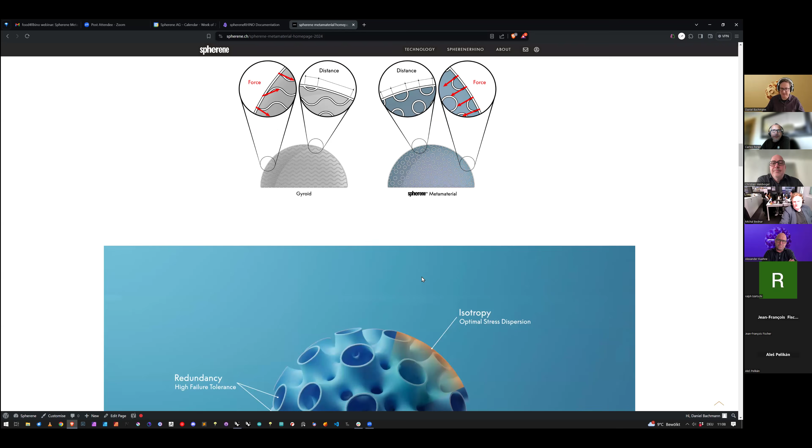So what Christian described before, I have some images here. We have this isotropy, meaning from all directions it behaves like force introducing, or it simplifies the introducing of force. We have this surface conformity - you see all these volcanoes following the surface. And if you would put this into a car bumper, for example, and crush it into a wall, all these little structures will still hold up most of the force that has been lost from the crushing of a little part of it.

Then we have fields where we can control density and thickness, and we do that in a very organic way. We do not distort any unit cells with a gyroid or TPMS structure in it. This always tries to be the inside or the outside of a sphere, and therefore we grow into your shape. So unlike other software where you first make a TPMS or gyroid and then cut away your shape, here you design your shape and design intent, and our structure grows inside.

We can combine any of our fields with any of our mesh modifiers. So here you see a cavity feature that is repulsing the minimal surface. Imagine you make a huge object for a movie prop where you want actors standing on it. You can make it hollow, so you do not print the inside, but on the outside we have a super strong thin shell with our Spherene structure that distributes the force all over. So it prints fast and it is very strong and lightweight.

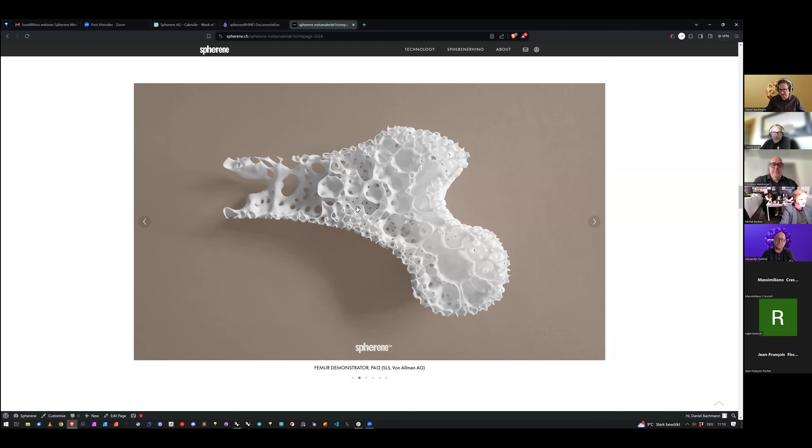Beautifully described here is the surface conformity, how it closes up to the surface. And also here, how fast we can make these transitions. They look really organic, like a coral or a real bone structure.

We can go really small with high performance materials. So this is an aluminium material, different kinds of resins.

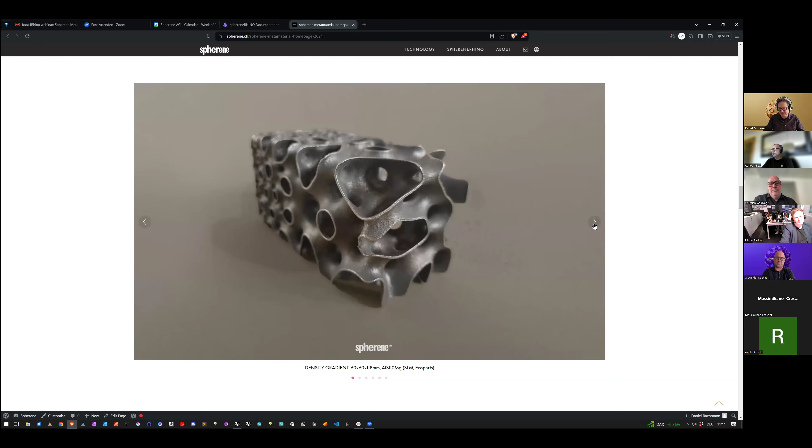Now, how does this look in Rhino? We worked really hard to make the best in class design tool. We provide you with an integration of Spherene, where in Rhino you work either with these points that you see here, representing our fields like density field, thickness field, cavity field, and so on. Then on the other hand, we work with mesh modifiers. So this sphere represents a so-called envelope, as we named it, and inside of this volume, this Spherene structure happens.

So on the left side, you see these black points with some values. These are radius values, imagine little spheres around each of these points. Then at the bottom here, we have this blue dot, representing a density point. So we need only one point and these few points here and this mesh to, by one button click, make this. You see this is a hollow sphere and it has kind of windows all around. This is a matter of two minutes of design work that I have to do.

You can import from any CAD software, just export your CAD part as a mesh, import it in Rhino, and work on your design. You will see how crazy fast and easy that is, so it's a huge time saver. So here you see the so-called envelope and a Spherene structure inside.

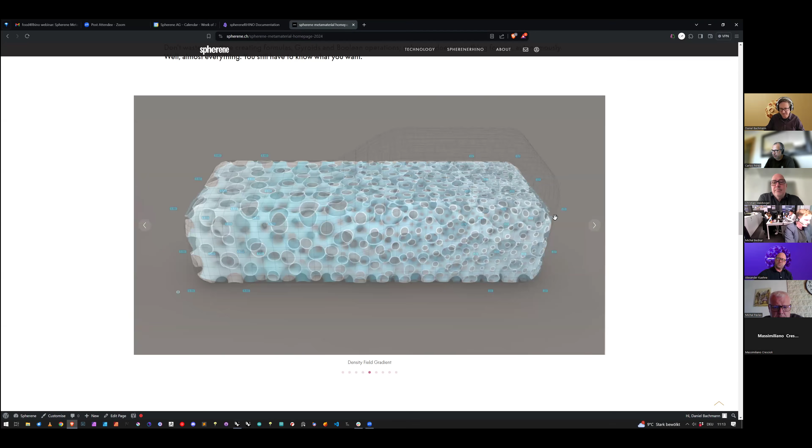Then you see a gradient of density. On the left side, we have these few numbers on points in position in space. On the right side also, and in between, we change from this 5.6 volume fraction to a 22% volume fraction in an organic way. The same is possible with wall thickness. These magenta dots represent wall thickness, going from 0.4 millimeters to 3 millimeters here.

Then we have a surface bias. We can also take the minimal surface that is really strong in its ideal position, and we can move it outside to the left or right and weaken it up. The effect that you see is small holes with long necks or big holes with short necks.

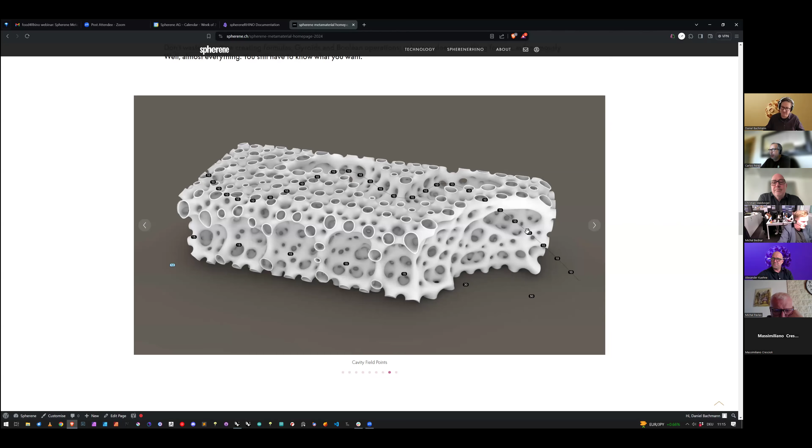And everything again in an organic fashion. Here you see some use of these cavity points. You can imagine an array on a line, on a curve, to make a cable channel so that the cable through this smooth surface will not be damaged, without modeling that in CAD. So you could do that, but this is another way how to creatively use our tools.

Then we have boundary meshes. So those are simple meshes that can be volumes or just sheets, dimensionless sheets without thickness. And we can tell them to thicken up or separate our volumes. So I will now show you what our release candidate 1 looks like. We have had alpha and beta versions for over a year now. And very, very soon, as Christian will tell you later, we will release this version.

So what is new? We have a toolbar with some really nice icons. So if you do not speak English, you can access these icons by image. So that's the main place where our Spherene stuff happens. The other space is in the layer system, and the next space you will see in the demo. So I told you we need a mesh. I create a sphere, a mesh sphere with a diameter of 60 millimeters. Now I create a new project. I click this button here, call it sphere.

Now watch this space here of the layer structure. I will be asked to select an envelope mesh, so I select this one. What happened is Spherene already populated our project name containing a meshes layer and a fields layer. In the mesh layer, we have an envelope, that is this mesh here, and the field layer is populated with the density fields with this point here. There is a number inside, 5.6.

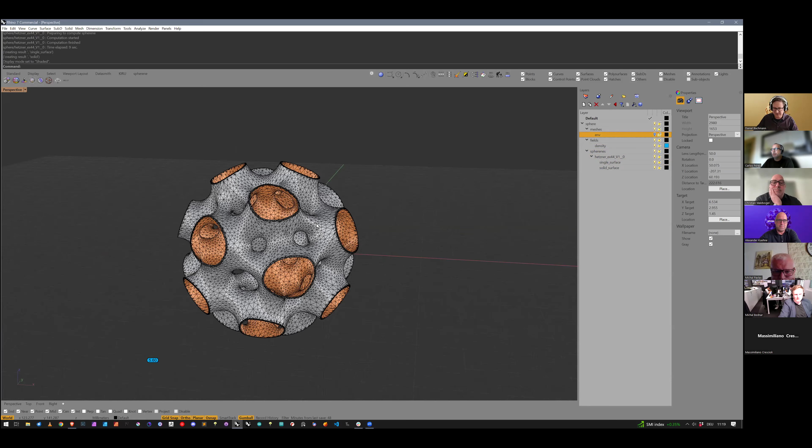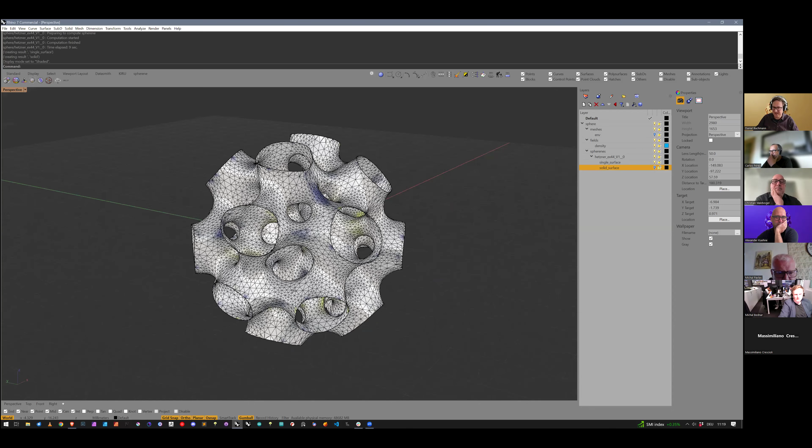Let's hide the original envelope and inspect what we have. The single surface looks like this. It has no wall thickness. It has some coloring here, and this coloring represents the quality of the surface. I told you before that we have the insides and outsides of spheres that we interconnect. At each of these interconnections, we have to grow the connection, so it will always be the best possible that is algorithmically feasible. So it's almost perfect, and this is what these colors represent here. So you can check the quality of your surface.

Then on the other hand, we have the solid surface that has thickened up to 0.4 millimeters. The interesting thing with this color scheme is you see the two volumes. Imagine this now to be an engineering part, a heat exchanger. In the orange part, you can have water flowing. In the gray part, you can have air flowing. And all in all, it is a structural part that is very rigid. So you can imagine your heat exchanger not being only a cylinder, it can also be like in a frame of an airplane, for example, and has real functionality inside.

The computation button, every time I click it, will generate an output here. So I can work on my design while it is calculating. So what I do now, I make a gradient. I just copy this point here and make a gradient from 5 to 16 volume percentage. I place this in the middle. The more points you use here, the denser your so-called force field will be. Let's shade this so that you see better what I do.

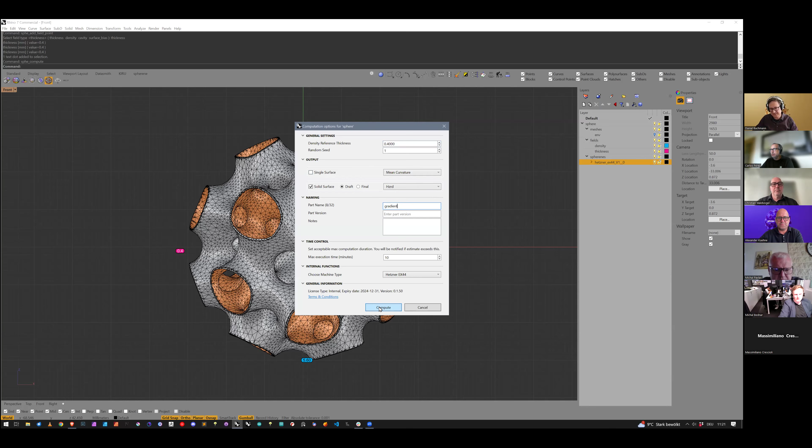Now I introduced the density gradient, and on the other axis, I want to introduce a thickness gradient. So here I can add field points. I have a selection of different field points. I select thickness, place 1 point here, 1 point here, double click the right one. And what this means: please do a 0.4 millimeter to 2 millimeter wall thickness change in this axis, do a density change in the other axis. Now let's calculate that and name this gradient, compute only the solid surface.

So now this is all cool. We have this open structure. Let's hide these fields. So we have the density and thickness field, and I will show you now what happens with the mesh modifiers that we have. So this is our envelope. I will use the same envelope and add a boundary now. Click the boundary button, click this object here. What this did, it made a copy of my envelope and changed the color and made this layer here.

If I would give this object here now a wall thickness, it will be an infill. But this is boring. We do something more complicated. So let's use some Rhino tools and cut this apart. So in CAD, you can prepare all these design intentions that you have. And as you see, I do not even think about the structure itself that it's generating. I always think about my design intent. I used mesh split now and split this mesh with these curves. So let's delete these guys and let's see. So we have now separated objects, all right?

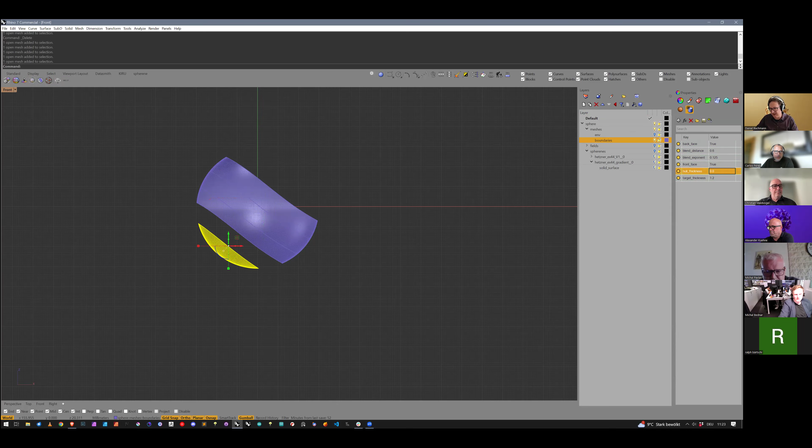Now I told you we have the toolbar as Spherene tool, we have the layer, and now I introduce this attribute user text, because here we have some functionality where we can tell an object to have a hull thickness, for example, of 1 millimeter. We can tell this one also to have a hull of 1 millimeter, but I change a flag here to false. And I will not explain it now because you will see what it does in the result. So I have the back face and front face changed for these two objects. So one is false true and one is true false.

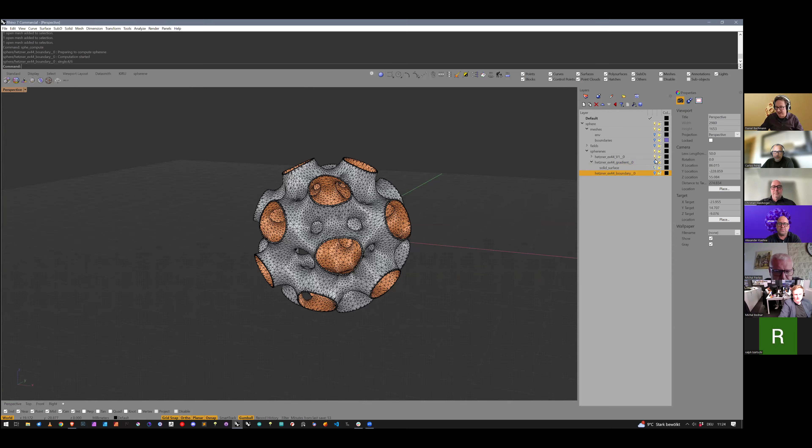And on this one, I leave the hull thickness to 0 and tell the structure to thicken up to that surface with a specific thickness. Let's calculate that. Let's call this boundary. And let's examine our previous results. So this was the first one that we created. And now let's check out the one with the gradient.

We have a density gradient that has lower density on the bottom and higher on the top. On the left side, you see a wall thickness of 0.4. On the right side, a wall thickness of 2 millimeters. And if I shade this, you can see how this looks. And while it is computing the result, I introduce a cavity field on the bottom here. I have to activate this one to see. And this is behaving like a sphere. So I tell this to have 60 millimeters diameter and I compute that.

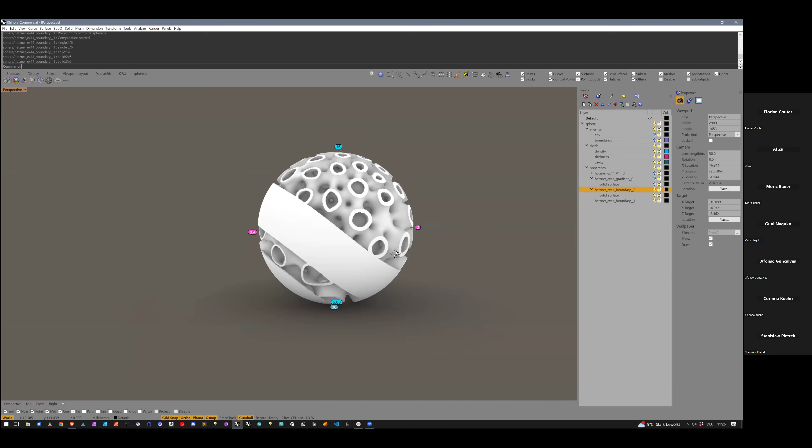So let's examine the output of the boundaries. So it didn't do what I wanted. This morning we encountered a bug. I hoped it worked. So the true false flags ignored what I said. This will be fixed on Monday. But see that we have closed the wall with 1 millimeter wall thickness using a simple mesh. So I made now something really complicated in about 10 minutes or so, without even having to deal with any formulas or anything.

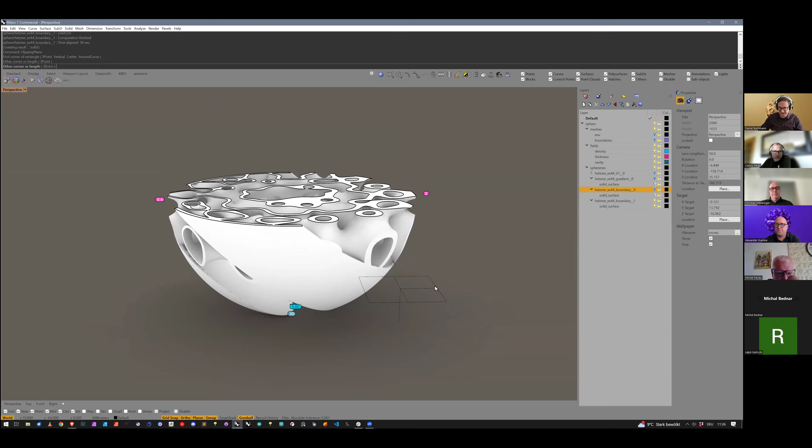Let's see this one with the cavity. Cool thing now is this is one object that is ready to print. You do not have to Boolean anything. It comes out nicely right out of the box. And now I want to give it over to Christian. And he shows you now what this means. I showed you now a little sphere, but what amazing things can you do with it? Christian explains that.

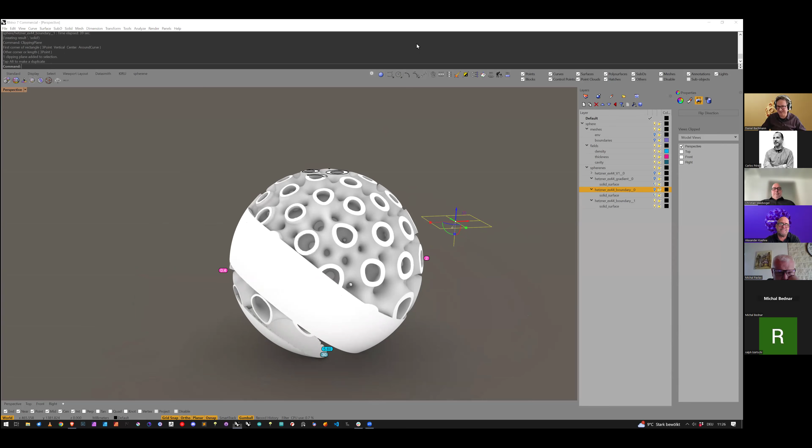Thank you, Daniel. Let me just switch over. Can you see this?

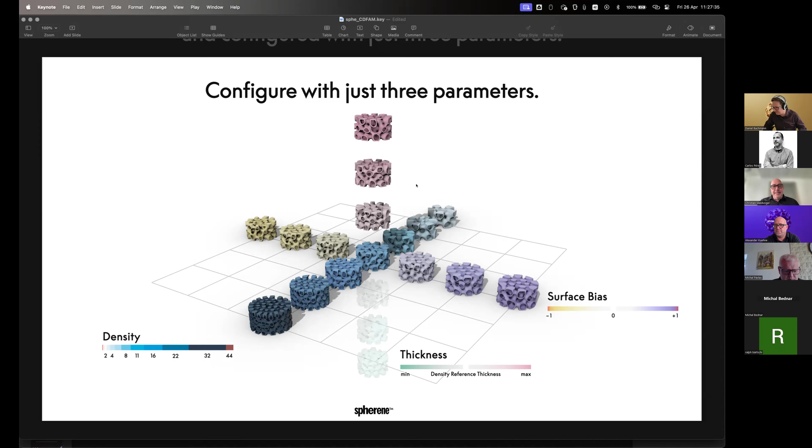Now, here we go. We tested these samples, and we see here that this all behaves extremely regularly and always follows the same pattern, for which I hope, in not too much time, we'll be able to provide a formula that predicts the stress and strain behavior of a surface.

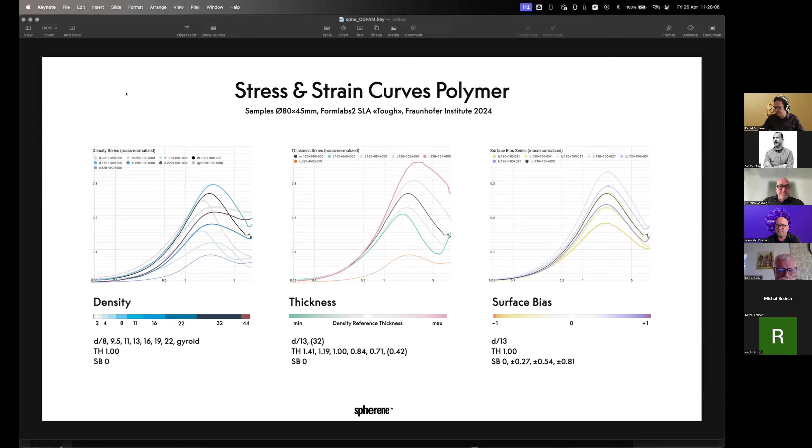One thing that's interesting to note is that the whole thing, because it is so regular, behaves with a density series that is the same as the numbers you might know from the old days when the aperture on a photo camera was still adjusted manually, right? So to make a meaningful gradient in density, you can use those numbers. So to go from 2 to 2.8 to 4 to 5.6, etc., will give meaningful differences.

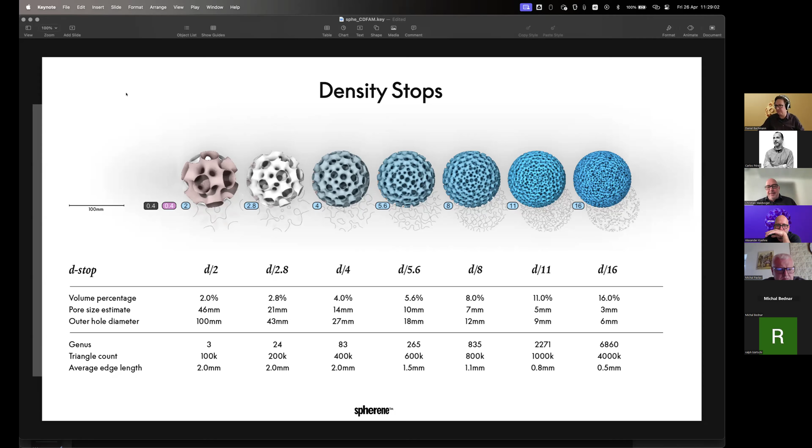Obviously, you can choose densities at any value. You can do 8 and 7.9, but you won't see that much of a difference. So this square root of 2 series kind of helps you when you want to go a bit thicker or a bit less thick.

Now, I want to show you a little project that one could do. We're going to do a small fixture. So we have a design space here, some forces that need to be countered by the part, and some interfaces where screws are going to be entered.

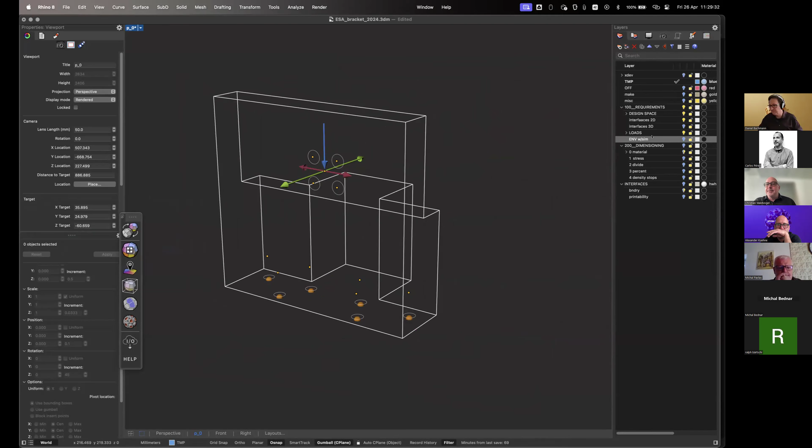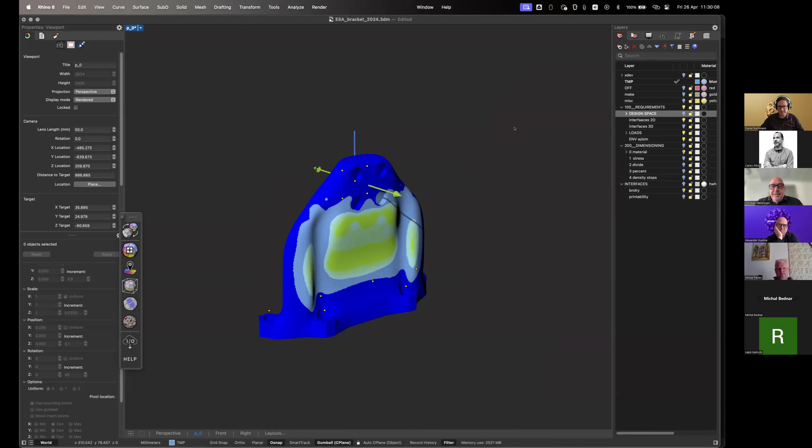We designed an envelope using, you could say, a combination of design, optical design, design intent, some engineering knowledge. But you could also use a simplified version of topology optimization, obviously, right? So we came up with this shape, and we designed some interfaces as solid bodies. I did all that CAD work beforehand, so we don't have to deal with that during the presentation.

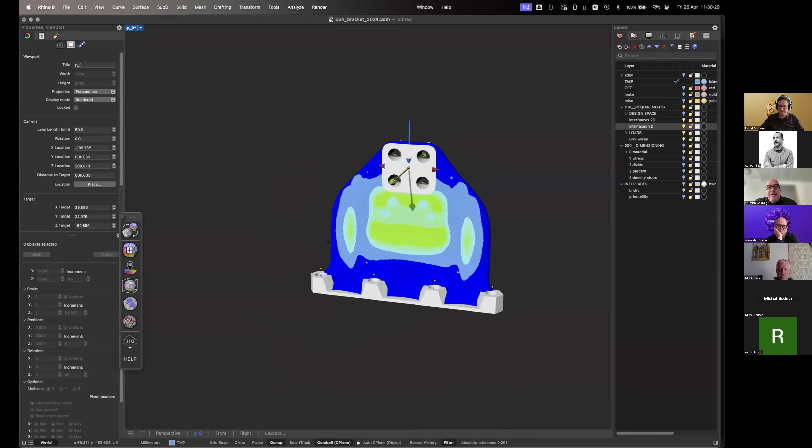Now, we simulated the loads that we're going to get on this envelope, as if the envelope was a piece of solid material. And because it's so thin, and because it's a demo, we just use a single simulation, so front and back are the same. That wouldn't be the case, obviously.

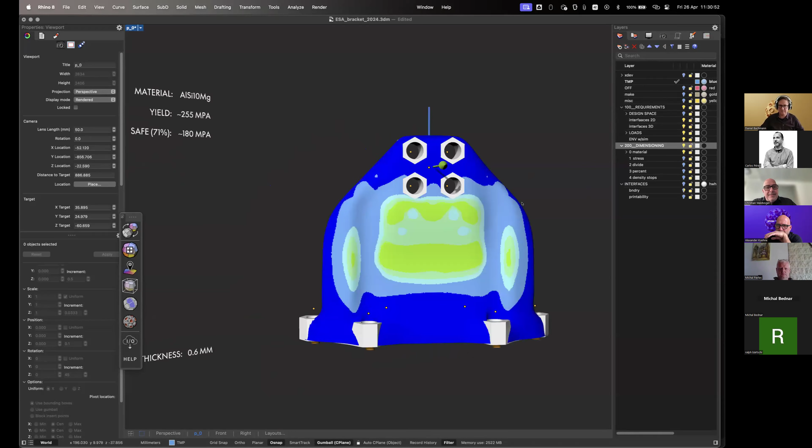We do have some material that is given, aluminum in this case, which has a yield strength of 255. And when we take into account the safety factor of 1.4, square root of 2, obviously, we see that we have a maximum stress that we can allow of 180 MPa. And we need to print at 0.6 millimeter thickness.

So if we look at the actual stresses that we see, this is obviously all ballpark. We're doing this off the cuff, right? So we see we have around 30 MPa in the light green areas, going down to 6 MPa in the dark blue. I just see that the image shifted here. I'm so sorry. I should move this over a little bit. Okay, now it's correct again.

Now we know we have 30 MPa. We cannot go above 180, right? So we do a simple computation. We calculate 180 divided by 30, which gives us 6. That means that 100% density, full material bulk, divided by 6 is 16%. That leads us to the knowledge that we can go for a density of 16 at the most intense places.

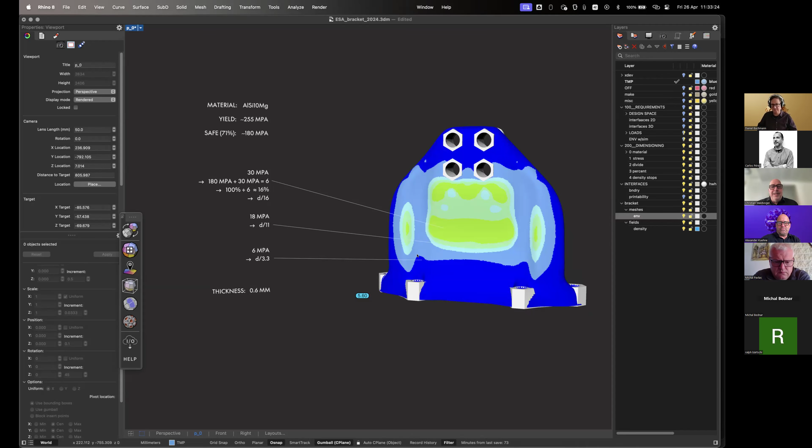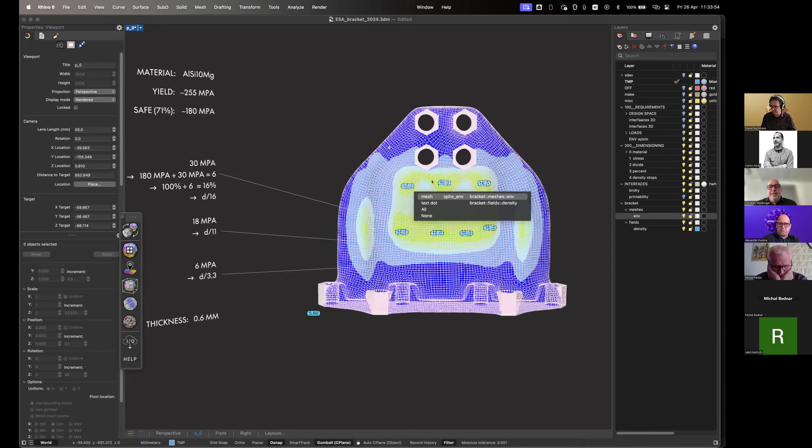Now we have to go and do the densities. So we know that the green here needs to be 16. So I'll press on this button here, say I want to do a new density point, I enter 16 and populate this here with a few such points. Doesn't need to be too many. And for the sake of simplicity, I'm going to group them real quick.

Then, from the cheat sheet we saw before, where I showed the densities, we know what the feature size is going to be. And we know that at 3.3, there's almost no material going to be left. So we know that 11 is kind of good for the actual size of this bracket. So we're going to do the rest at density 11.

So that means from here on, we're going to have 11, right? And out here as well. And I was a bit oblivious that we need 16 here as well. So that's our density field. We see that we have a new layer here, density, right? So I'm just going to quickly select all those and group them together. We don't need that. Sorry, wrong. Don't need that one here.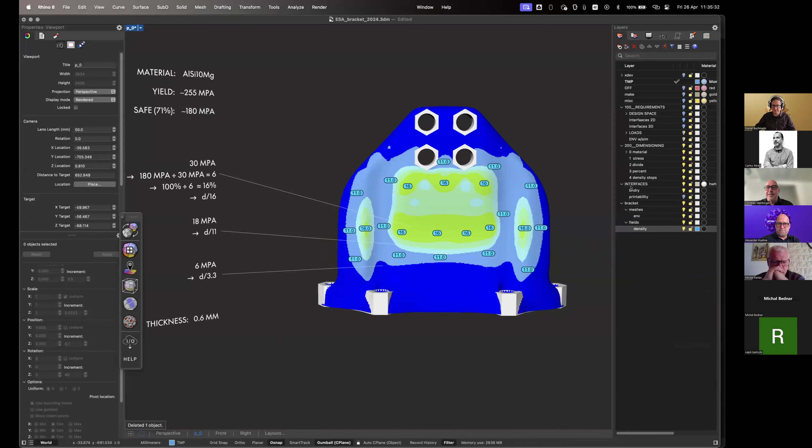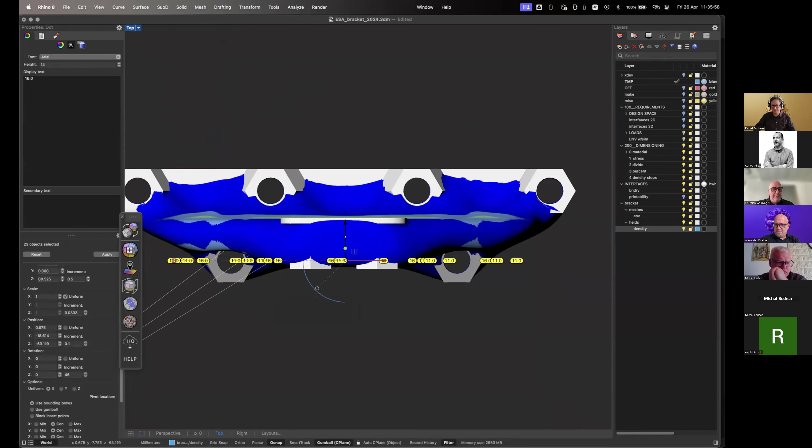So if we look at it from the top, we see that these densities are obviously now on the surface and just on one side. And because we're doing it the simple way now, we're just going to repeat them across the whole depth of the part so that we get an even density distribution again.

As we heard before, we are ready to go. So we're computing. Now, take note here in the density reference thickness, I entered 0.6 because we have to think of the densities being calculated for a thickness of 0.6. That's why I put it up here.

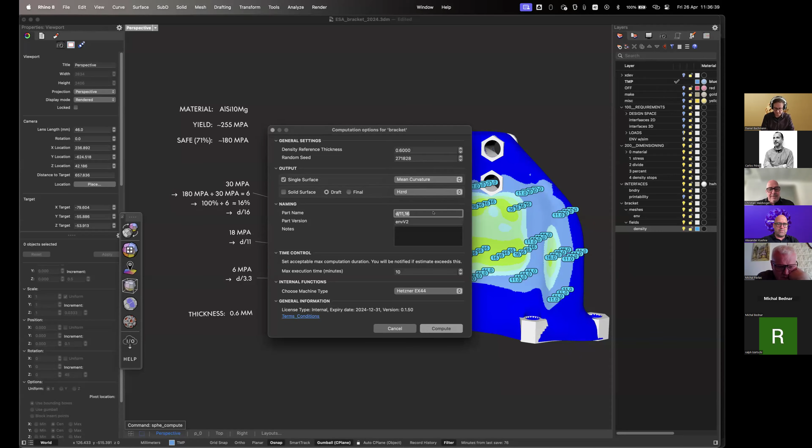We're going to show the mean curvature here in the single surface and call this run 1, for example, and go. So this is running now. While it is computing, we can continue our work with the stuff that is going to be relevant in the 3D version.

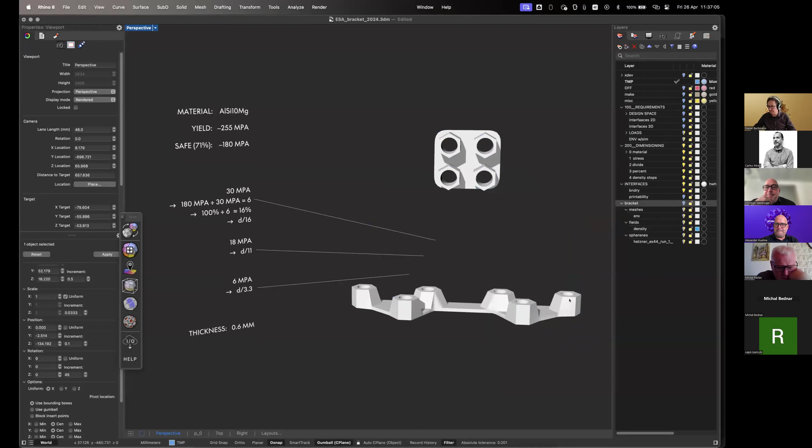As you can see, we have these boundaries here that are prepared. So we're going to select them, go to this button here, say add boundary, and we did. So let's remove them from here and show them in the bracket again. Oh, we have the result already. We're going to talk about that later. So these are our boundaries.

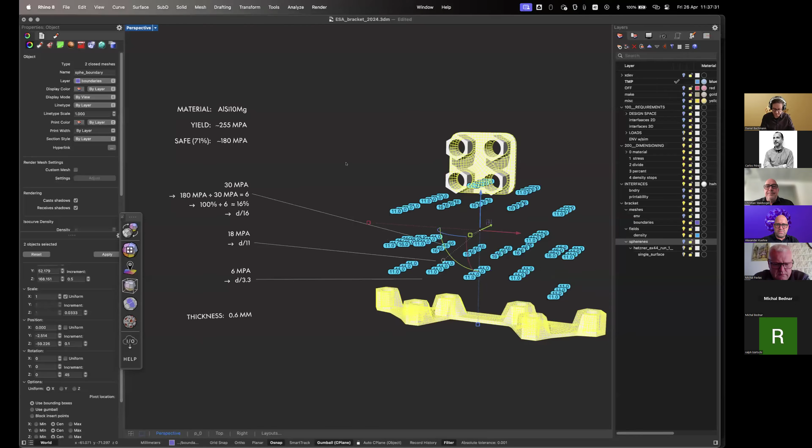I'm going to specify them in the user text up here. We leave everything at default for now. Maybe we can do the target thickness a little bit thinner. Because they're all 3D objects, solid ones, I let the hull thickness at 0, which means they're just going to be solid with no additional thickening.

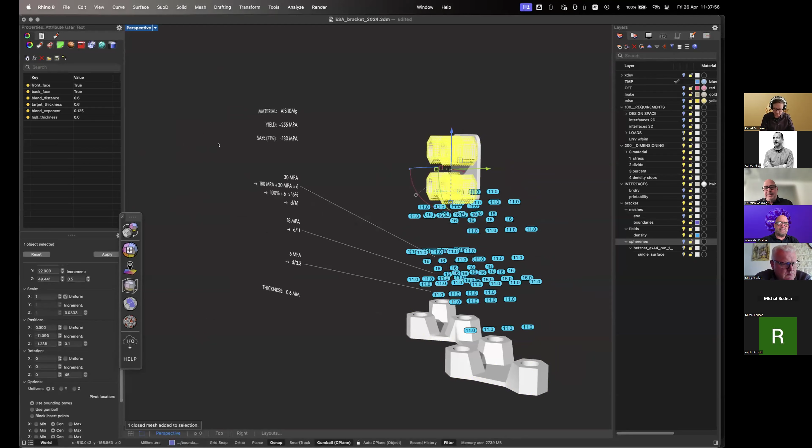Now, if we go back to the result that we have here, we see that we have received this result, which has the densities that are needed to counter the stresses that we will expect. And we see one bad thing, and that's these outer regions here. They produce problems in printability. So to counter this, I have prepared

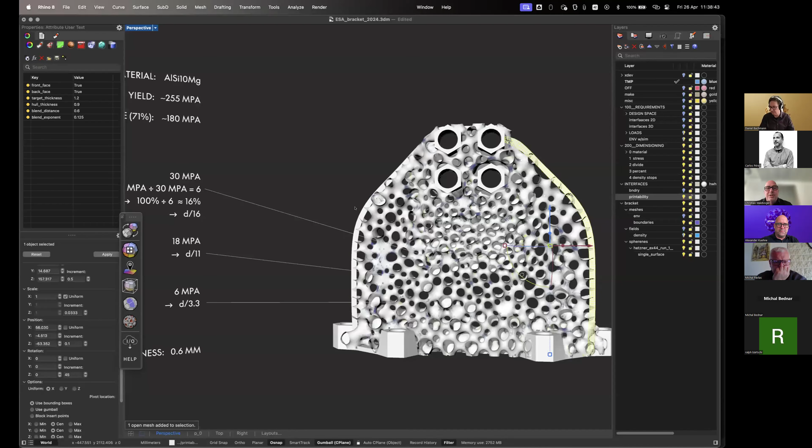a little piece here. I just cut a section through the envelope and created these two small two-dimensional lines that I'm going to add as boundaries as well. So I just did that. I remove it from the printability layer, and we see we have those boundaries.

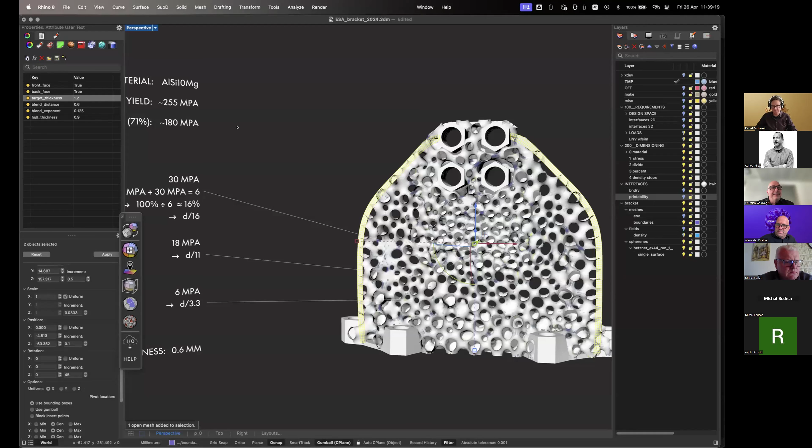And now they are going to receive a hull thickness, because otherwise they would just cause the TPMS structure to thicken. We want them to really show, so we give it a thickness of 0.9, and that's it. Now we are computing again. We want the single surface with the density shown, and we want the solid surface, and we call this run 2. And we'll go.

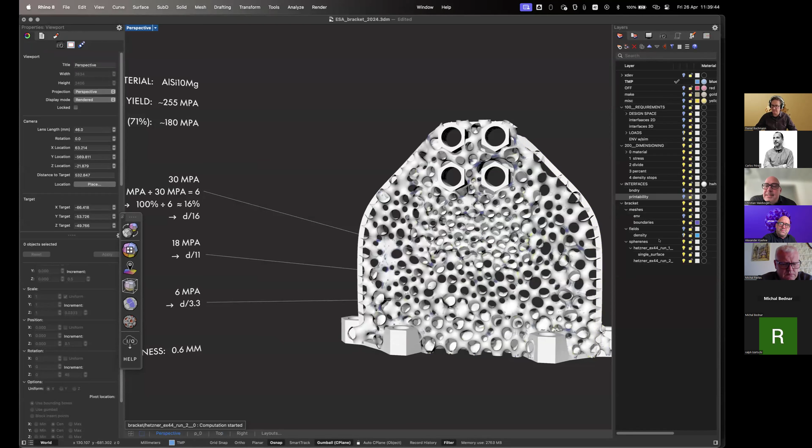Now, in the meantime, let's look at the 2D surface. We see here these colors. As Daniel mentioned, they indicate the degree of mean curvature 0, and we see that in some points it's not ideal. However, for us, we just balanced the time it takes to compute something and the minimal mean curvature quality you get.

So in later versions, there will be possibilities to adjust this to accept longer computation times but get better curvature. Now we see we're at 3 of 6 steps in the solid computation. 5 of 6, so we're almost there. And now we're just waiting for the result to be delivered. Here it is.

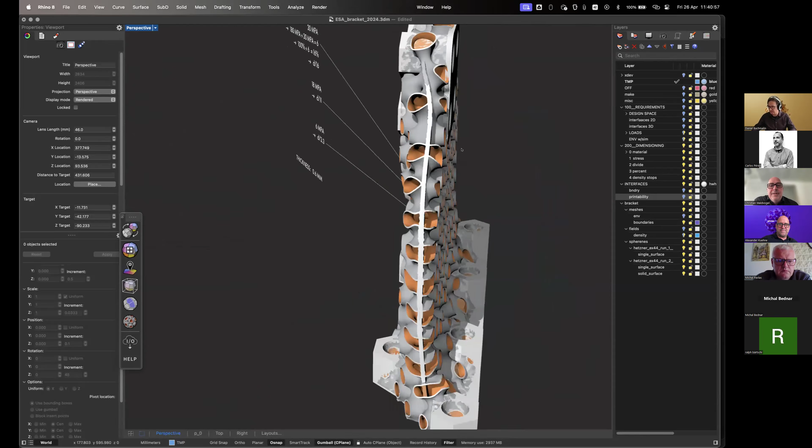So this is now our fixture. It has this boundary at the side, which makes sure that it's printable everywhere. It has the density that we needed. The stiffness in this direction is actually covered by a mixture of the design of the envelope and what we told it to do. And we have all the interfaces with nice connections to it. And it's printable like that.

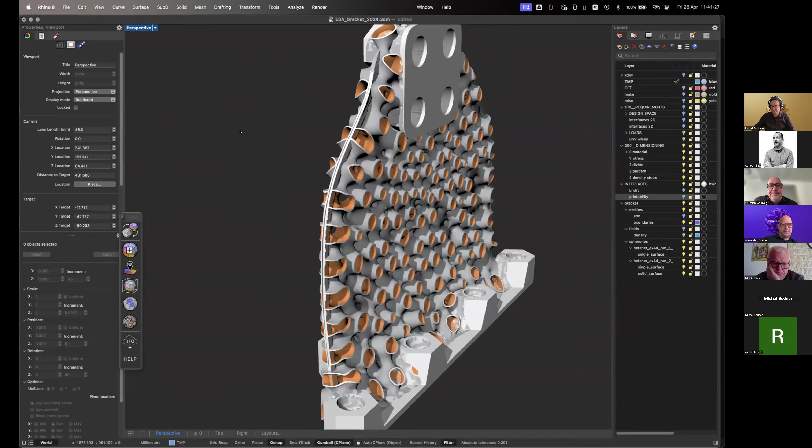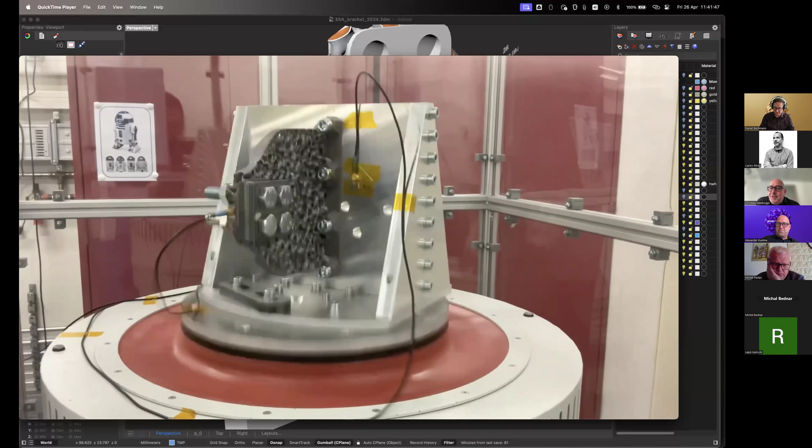And to take things one step further, this is actually a bracket that we did for the European Space Agency. And it did survive all the shaking up to 1000 Gs. So naturally, what we see here is a first ballpark iteration. It's like a dimensioning that gives you the first point to start.

And from this to printing it and putting it on the shaker, there were a few iterations that involved validation on simulation. And so this will still be necessary, but you are very quickly very near to a potentially functioning result.

And speaking of simulation, if there's anyone on the call that works for a company that is willing to accept the challenge to work with us to integrate some sort of sheet and solid simulation on that, please come talk to us.